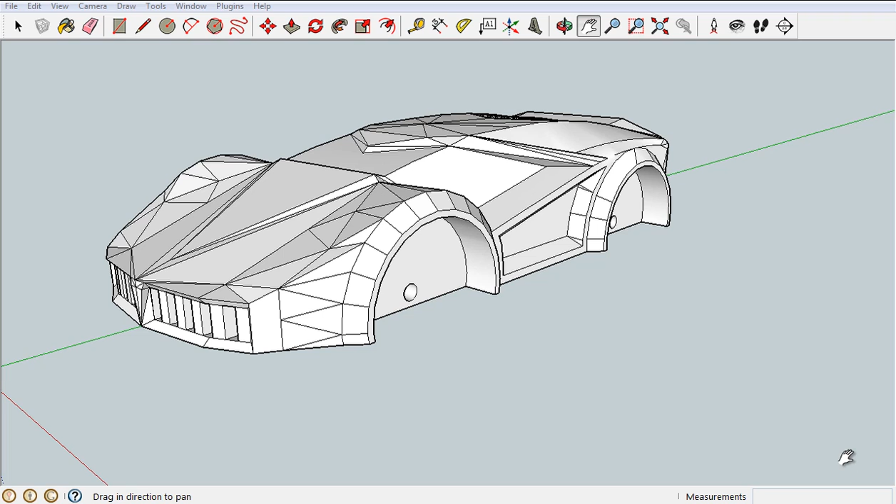One of the first things you should do before you even start making your wheel is just double check your car to get some dimensions, but also to make sure that it's going to fit on the track. So to do that, I like to take the offset tool and grab the edge of the axle hole and just offset it inside the wheel well to make sure that there'll be enough room. I like to leave around 1 to 2 millimeters around the outer edge of the wheel. So basically I'm just putting in place here a wheel just to measure to see if it'll fit.

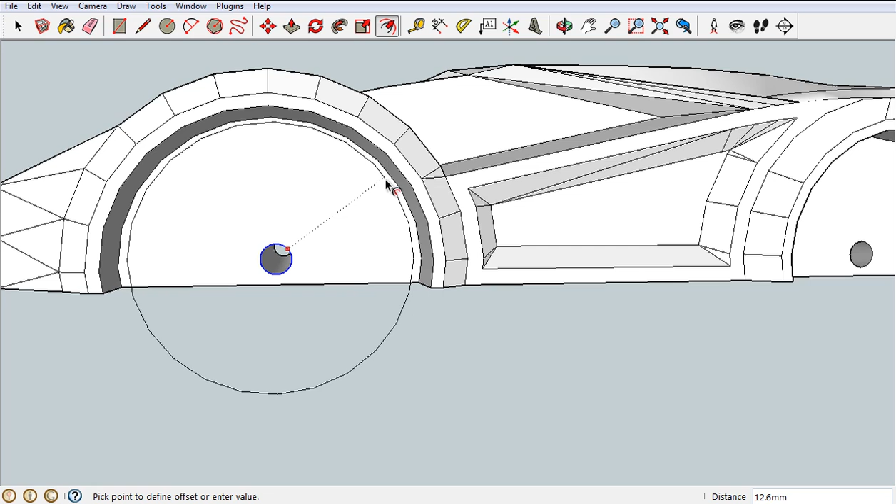So if you go too close, it won't spin very well inside that wheel well, because if it bumps into any little bit of plastic on the inside there, it can kind of act as brakes. So I like to leave around 1 to 2 millimeters. And then what you really need to check is the distance from the base of the car down to the bottom of the tire. So if I measure from here down to here, you can see I'm at 10.2 millimeters.

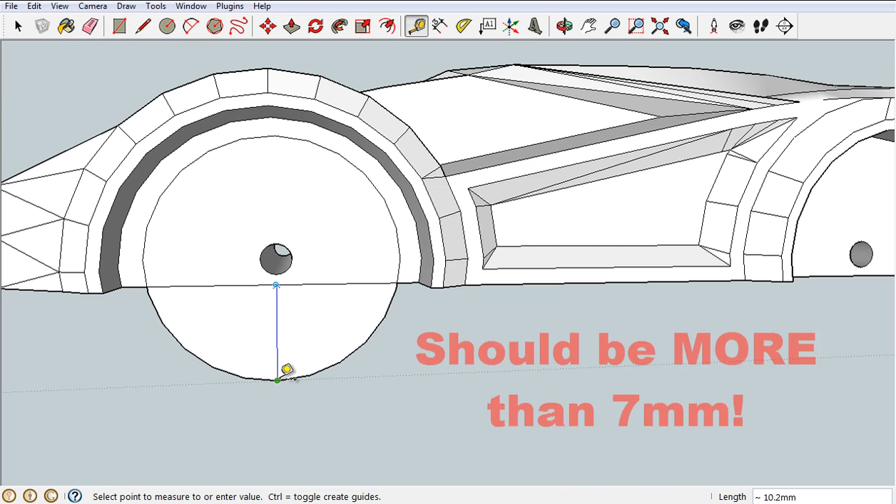There's going to be a 1/4 inch rail underneath the car that comes out to 6.35 millimeters. So you want to have at least 7, but I'd probably recommend more like 8 or 9, or in this case even 10 millimeters, just to make sure that your car doesn't touch that rail as it rolls down the track. So I can see here it's going to be plenty of clearance.

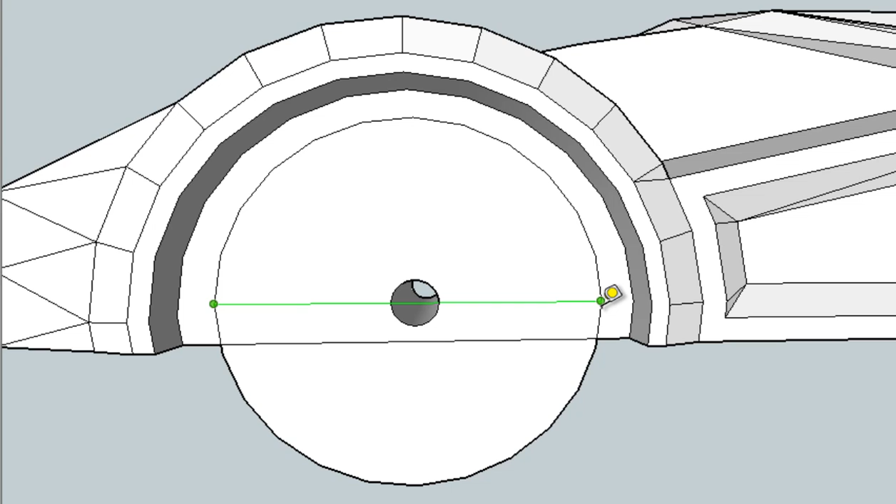Then you want to take a measurement to see the diameter of your wheel. So I'm going to go from one endpoint through the center of the axle hole over to the other one, and I get a number of 25.7 millimeters. So that could be the size of my wheel when I go to actually start designing. Again, you want to make sure that you're leaving around 1 to 2 millimeters. Right now I've got 2.1 millimeters between your wheel and your wheel well, to make sure that there's plenty of clearance for the wheel to spin in that opening. So one more time, I forgot my number.

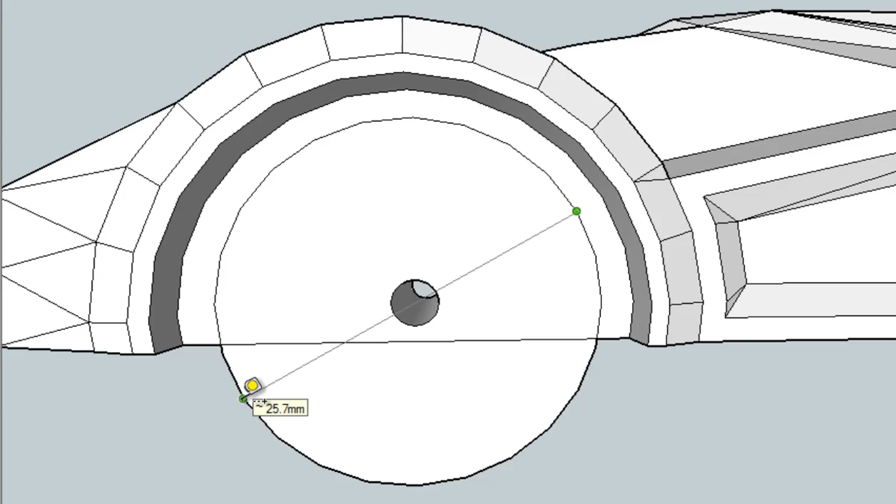I was 25.7. The other measurement that you'll take very quickly is the depth, and you're going to measure the depth of your wheel well, so from the car outward, and I've got 7 millimeters, so I'll make my wheel 7 millimeters wide. So once you have those two measurements, you can begin designing your wheel. I believe in my tutorial I actually have you working on it next to the car, but it's probably actually best just to open up a new file. That way you can design from the origin of the axes, and that'll make it a little bit easier as you're working.

So you'll grab the circle tool, and before you actually start drawing a circle, you want to change the number of sides. If we just do a 24-sided wheel, you can actually see the edges are pretty jagged, and that won't roll smoothly down the track. So instead, you may have to get off of the tool and select it again. You can just type in the number. You don't have to click in here. Just type in the number 200, and that's going to increase the number of sides a lot. You actually have to enter to save that or select it.

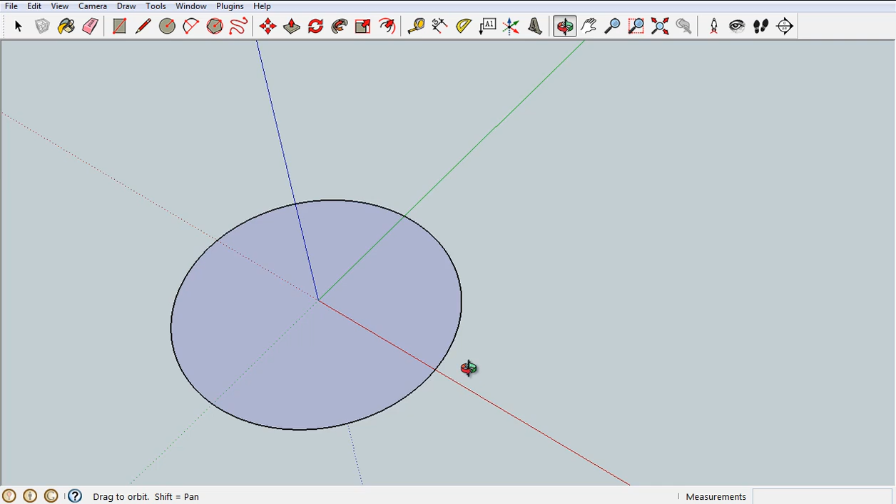And now as I draw my circle, you don't see those edges at all. So we've got a circle with 200 sides instead of just 24. That'll be much smoother as we're rolling. So my wheel was supposed to be 25.7. So as I'm drawing, let's zoom in here a little bit more. It's giving me a radius. So if I want a wheel of 25.7, I'll round up to 26 millimeters, that means my radius would be 13. So you're going to need to keep that in mind as you're drawing.

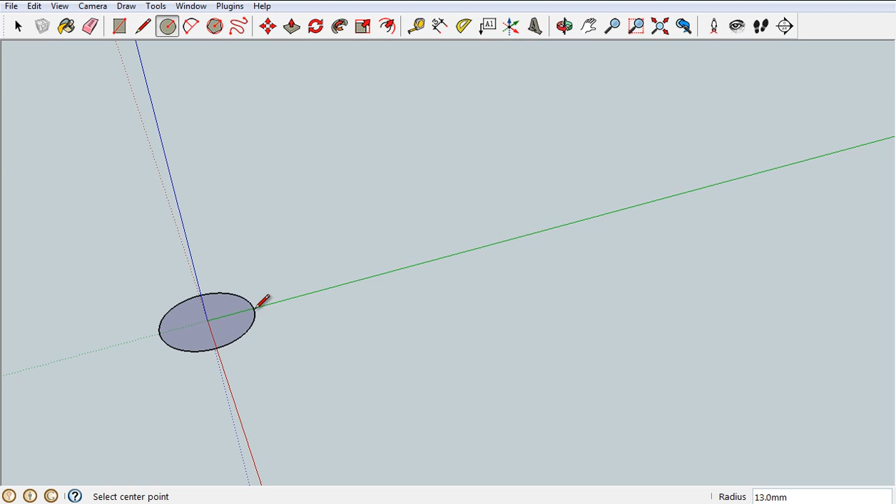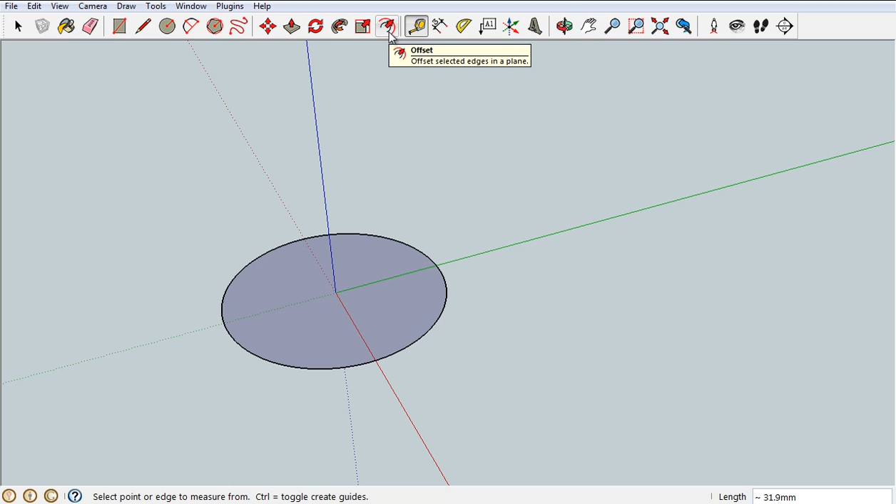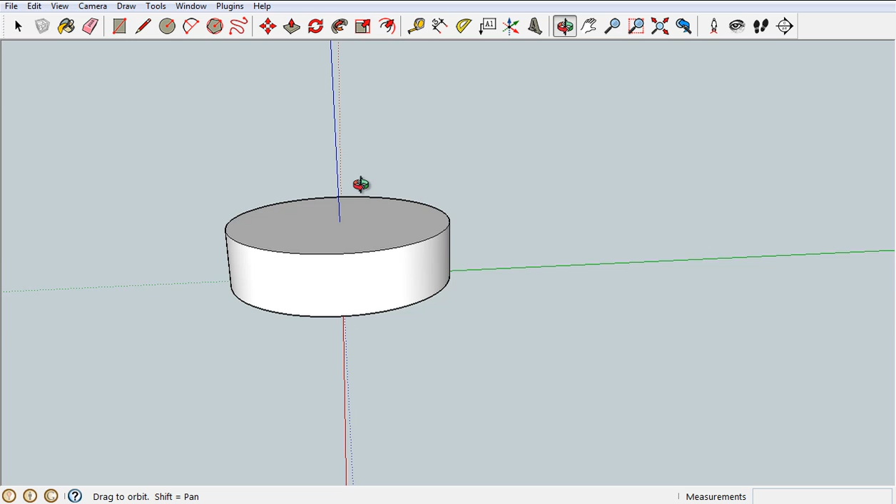And now I've got a wheel that has a diameter of 26. If we double check here from one side across, we're at 26 millimeters. The other measurement that we took from the car was the height of the wheel, or the depth of the wheel well opening, and that was 7 millimeters. So I'll push this up to 7 millimeters, and that would be a very, very basic wheel. Again, the nice thing about working on the origin, if I need to find the center again, it may not work on the top side, but if you orbit underneath the origin of the axes, you can always snap back to that as the center of your wheel.

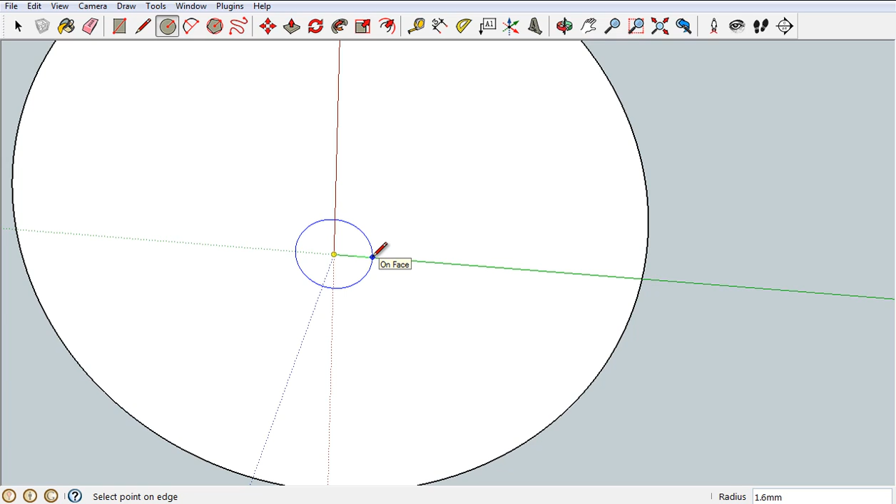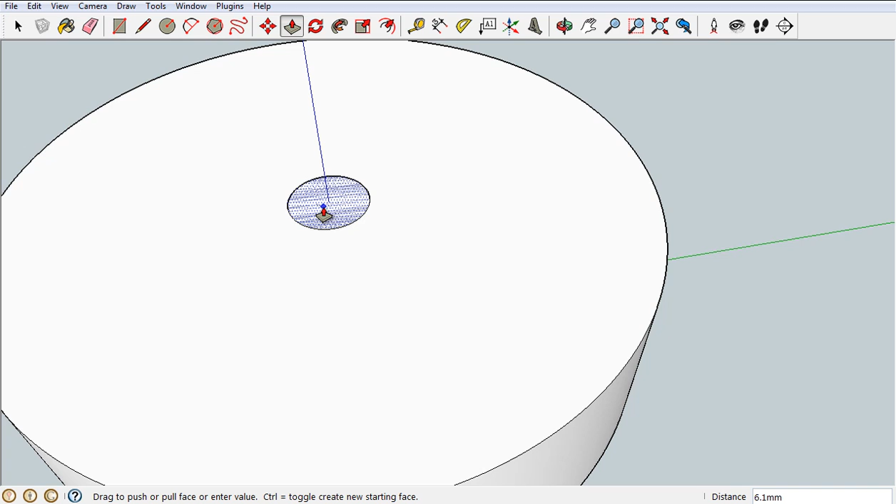So the next thing you'll need is your axle opening, and the size of that's going to depend on what you're going to use to attach your wheel to the car. I've been using 3.2 as a diameter, so that'd be 1.6 for a radius for some of the screws that I've been using. So I'll make a radius of 1.6, and then I can push that through to the top. Just like putting the axle holes in the car, if you go too far through, you can always just push that back down. And you want it to say on face, and then when you let go, it's going to actually open up all the way through. And so that's it. That's a very simple wheel.

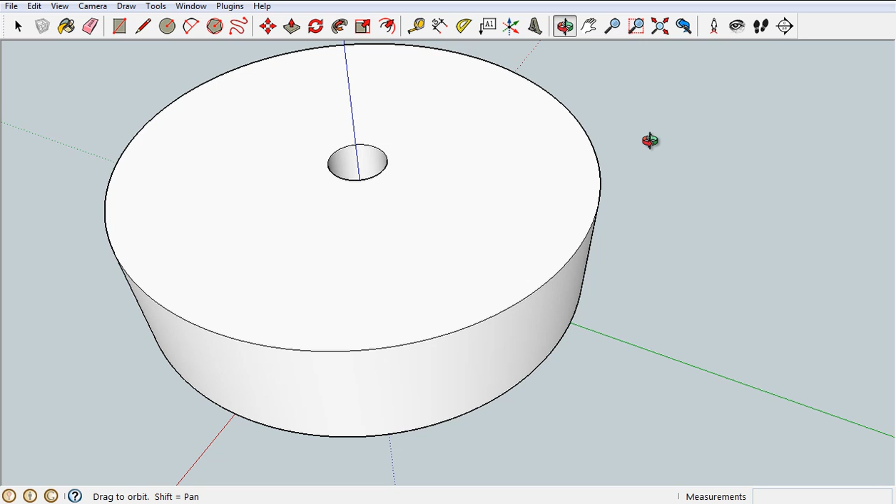That would get us practically 0 points for the wheel design section. It says it should be detailed and realistic and have different dimensions, and right now we have just basically a cylinder with a hole in it. It's also not going to roll great. You're going to have a large surface area that rubs against your car, and you've got a large surface area that's going to be rolling on the track. So to improve this, there's a few different things that we'll work on in the next couple of tutorials.